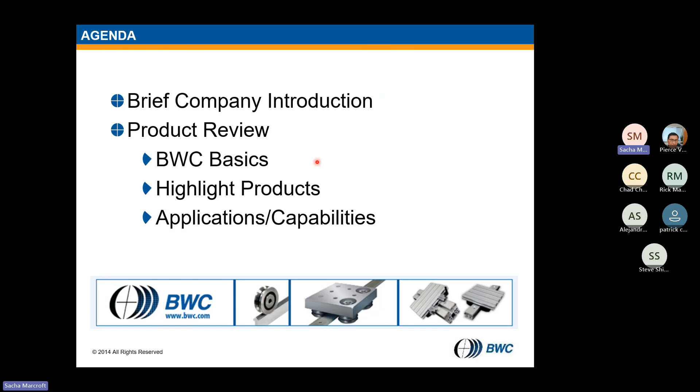There it goes. So we're going to do a basic overview of who BWC is, which is really just a few slides. And then the rest of the deck is getting you familiar with the basics, and then show you some pretty neat applications on how to apply the product.

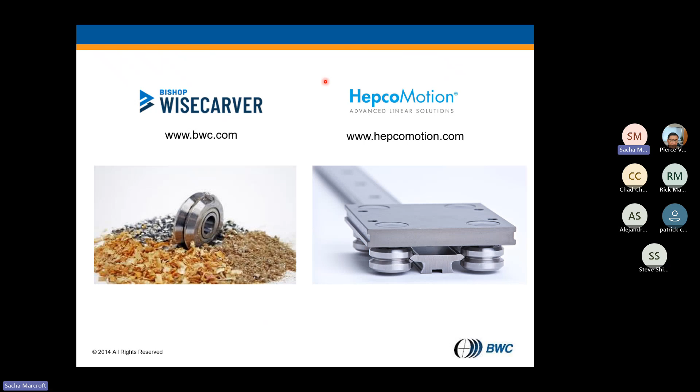All right, so BWC is a U.S. company. It's actually two parts. It's in Pittsburg, California. The other half of the company is HEPCO, which is an English company. They're two separate companies, but they work together. I'll kind of explain the differences here.

So BWC, again, in Pittsburg, was founded by Bud Wisecarver, kind of an interesting fellow. He's kind of what I call farmer ingenuity. He literally had an application for agriculture in the dairy side of things, and came up with this 90-degree wheel in '72, and I'm going to dive into that a little bit.

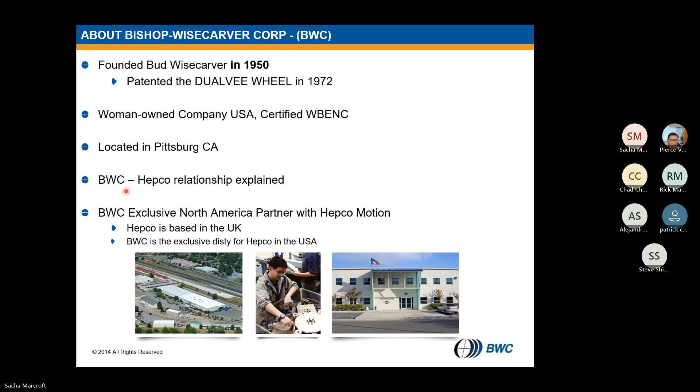So the relationship with HEPCO: BWC is the U.S. master distributor for HEPCO. HEPCO is an English company. We'll take a quick look at those guys as well, and then HEPCO is the master distributor for BWC in Europe. So we cover everything in the U.S. They cover everything in Europe, and that's the relationship. So the key people here, in case you ever need to contact anyone.

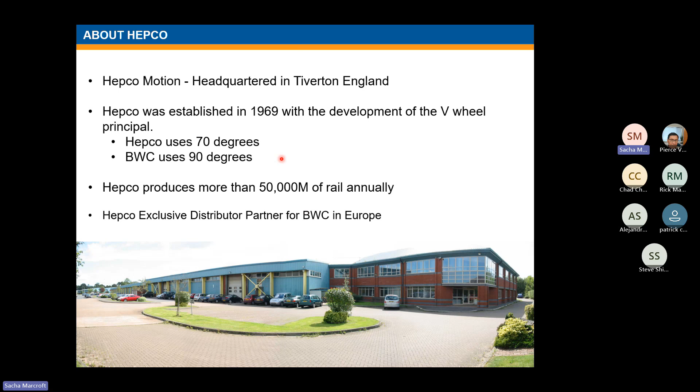HEPCO is headquartered in England. They were founded in '69. HEPCO makes a 70-degree wheel, and BWC makes a 90-degree wheel. Again, that doesn't make much sense just this moment, but you'll see the difference here in a second. And so they produce all kinds of exotic ones, especially curvilinear and other big assembly type applications. So this is kind of where you'd want to apply this stuff.

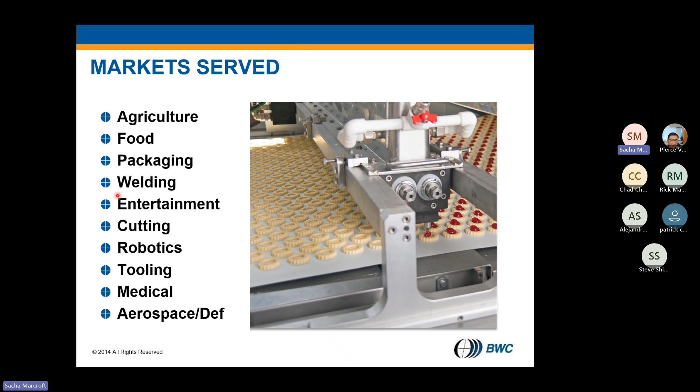These are the same markets we're all covering currently. It's a nice product for dirty, wet, dusty environments. In the entertainment side of things, it's a very quiet tool. And so you'll see those on a lot of the camera booms, the big cranes. A lot of live entertainment has cameras on the end of a crane, and the crane's really quiet. You don't want to have bearing noise while somebody's singing.

So this is kind of the strategy for this product group. You're looking at long, dirty belt drive. It's fairly inexpensive; you can get a 50-foot actuator. With most companies, a 50-foot actuator is something custom. With BWC, it's not a standard, if you would, but it's just part of their skill set. So part of the reason we picked this up was because they make really large rings, which you'll see in a little bit here. Super easy to align, which is another huge feature, and a simple setup, and again, very quiet.

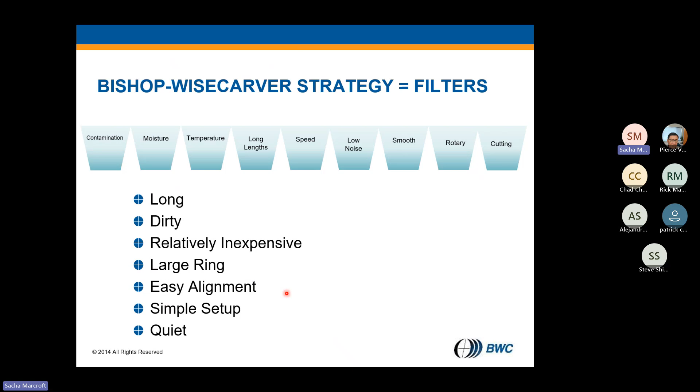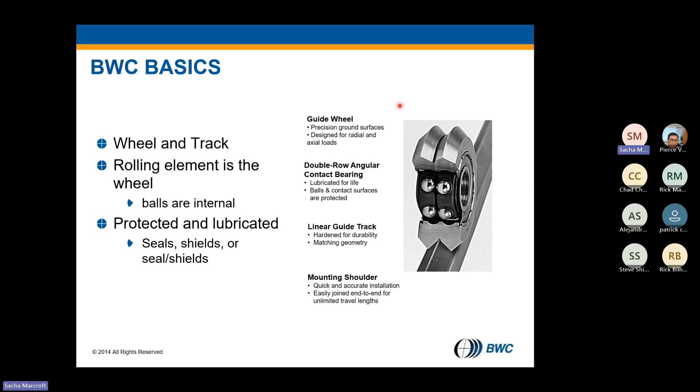So here's the basics, here's where we get into the fun stuff. So the basics of this thing is like most bearings, you get the bearing in the block, and the block moves back and forth, and it rides on bearings. In this particular case, we've got a wheel that's riding on a track, and then the bearings are inside the wheel. Notice the V there. BWC does a 90. HEPCO does a 70. It does basically the same thing.

The principle of the wheel itself: you've got two separate radiuses on a V. You've got the inside radius in here, and then you've got the outside radius. When this wheel is moving back and forth, the inside radius is moving at a slower surface speed. On the outside radius, it's moving at a faster surface speed. But they're part of the same wheel. So what that does is it ends up wiping the rail off as it moves back and forth, which is a great feature for dusty applications, machine chips, anything like that.

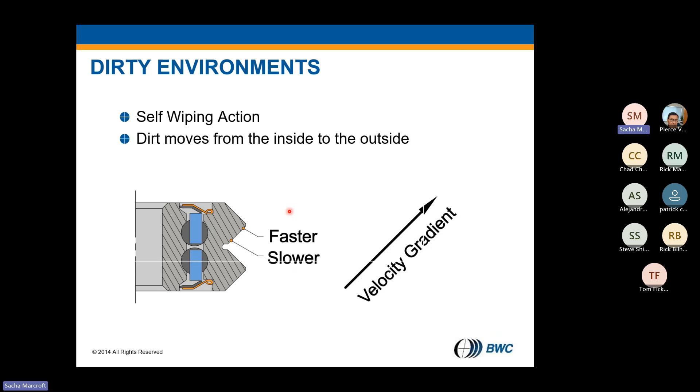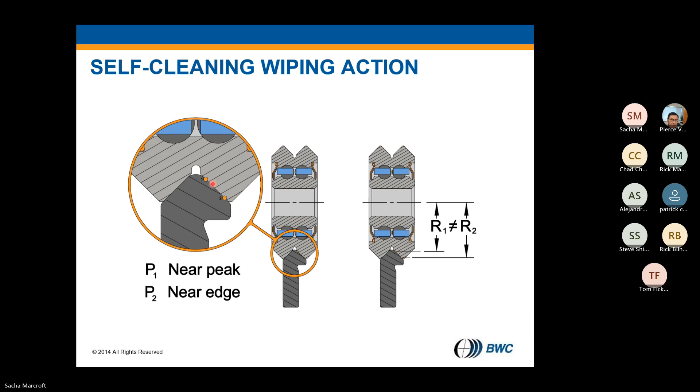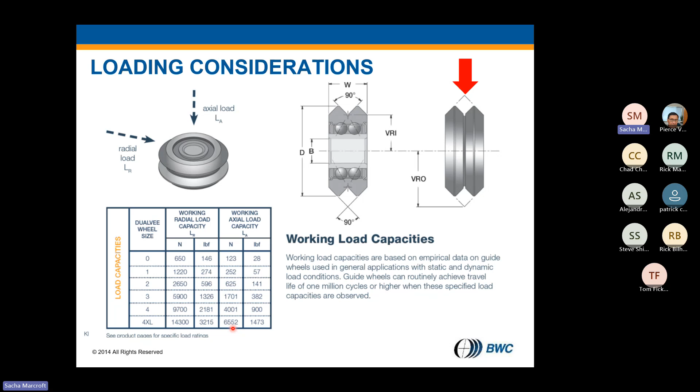The wheels get pretty large. You can get some pretty good load ratings, and this is a per wheel load. So key differentiators: great wiping action, good in harsh environments. Kind of covered that a lot already. Really easy to assemble. We all work with a bunch of customers that think they know how to do stuff and then don't know how to do stuff. This is for the guy who can't really put together a machine that well. Sloppy welds, extrusions. It's a nice tool for misalignment. It's going to be a lot freer.

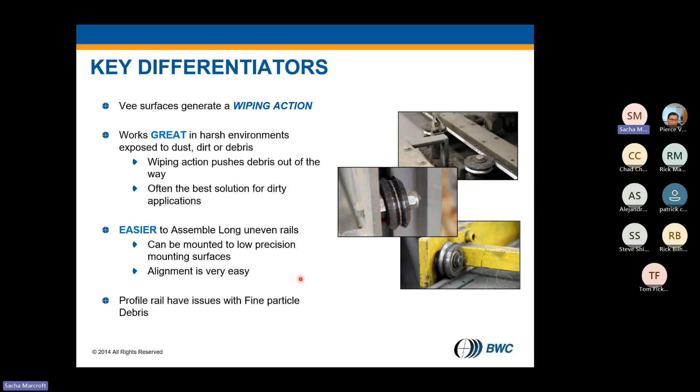The load ratings, as you saw, aren't as high as equivalent load ratings for a pillow block or a profile rail. If the rails are not properly aligned, toed in, toed out, not perfectly parallel, they're not going to move. So just know that this is your tool for that guy. Profile rails don't like fine particles like powder, flour. Again, the laser ablatement stuff is super fine powder. It gets in the bearing and seizes them up. Ball screws have the same problem.

Don't get yourself killed. They have wiping pads, and what that does is lube the rail for you. They also have lube pads for the wheels. You put a drop or two on there every couple of months while this thing's moving back and forth, and you're going to get a longer life. This thing does generate particles. It's self-wiping, which means it wipes itself off. So it's a little bit tougher in a clean room. It's possible to use clean room grease, but just know it particulates.

Consider preloading. This is not a precision tool. You're going to see the catalog, and everybody thinks they're precision. They call out precision ground rails and this and that. It's not a precision tool. It's going to be great for long stuff and dirty stuff.

Even though the wheels say wash down, uses caustics and other nasty items. The wheels and the rails are carbon steel. Carbon is the key word. It's going to rust. You can coat the rails, but they're gonna eventually flake. They're the best horse in the glue factory, is what I like to say.

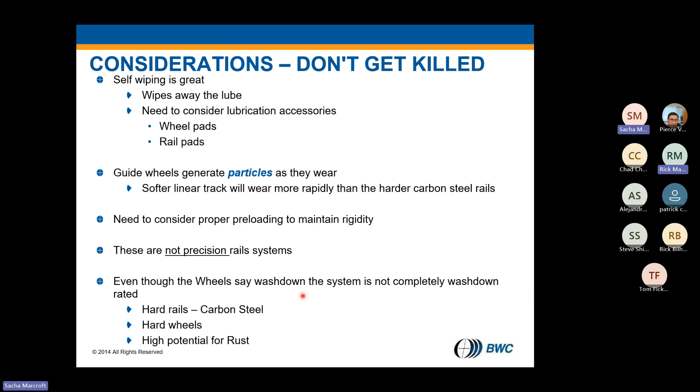All rails are gonna do the same thing. These are just gonna be a little better. All right. So not the greatest for wash down, but they can be in wash down, and they will rust. Just an FYI.

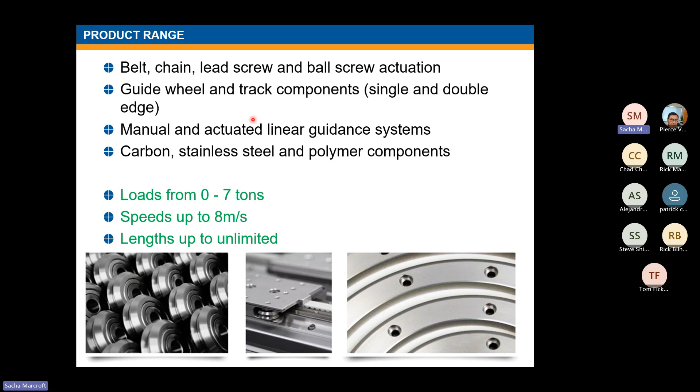All right. So some of the products, some of the choices. They've got actuators with belt, chain, and screw. I'm going to show you some manual ones as well. They've got a bunch of different product that we're just going to kind of overview real quickly here. So the key to this product is a wheel and track.

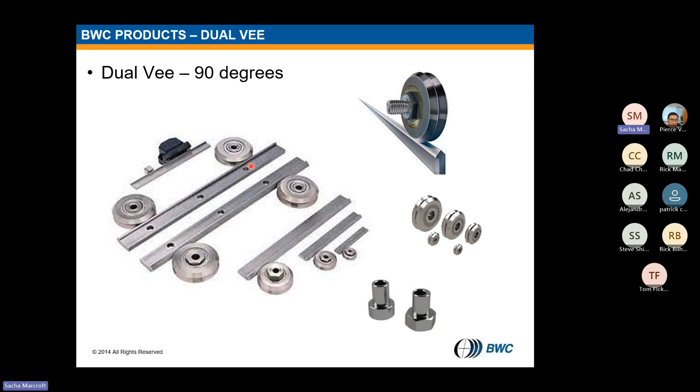If you guys are specifying it to an OEM, you're more than likely going to set up this kind of a situation here, or we can order pre-drilled. You can drill your own. There's all kinds of different rail types that we can choose. There's different hub types. There's wheels with hubs, without hubs. You can put a stud in them. Here's the stud version. So lots of different setups. This is going to be your main go-to for an OEM.

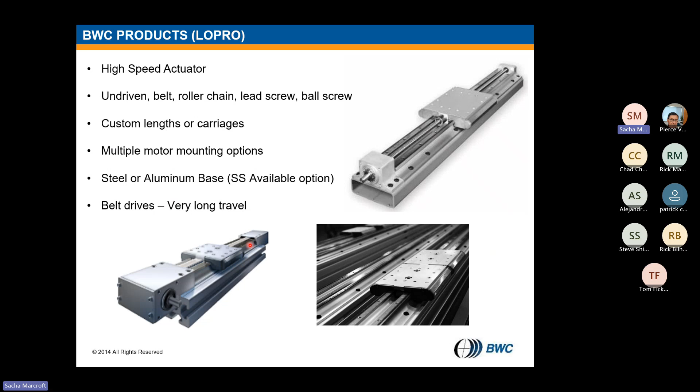Here's some examples of some different tools. They have bracketry set up for gantries in case you wanted to do a gantry with a stinger. They use this same tool as an RTU for different robots. Here's that LoPro. This is kind of a better view on the bottom here. They do aluminum based and steel body based as well. So they've got a few different setups for these guys.

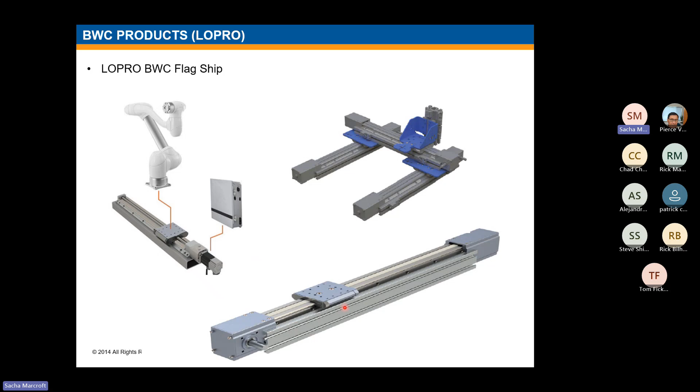This is another nice little tool. It's called Utilitrak. It comes in 3, 4, 5 wheel carriages. The unique thing about this thing, again, is that alignment I was telling you about before. This is an undriven tool, but you can put your own belt or whatever else you're doing if you're doing a big gantry. We've done a lot of manuals with these as well.

You lock in one side with a V, radially, and then you float the other side with the crown, so that your alignment isn't as critical. When you're doing a 10-foot gantry, aligning things gets a little bit tougher, especially on an extrusion. So this is a nice little tool for that kind of use.

They're employing this tool right now too in a telescoping type rail that should be coming out here pretty quickly. Would be a nice little tool for extended trays. Different machines use different rails for different reasons, but telescoping is always one that we get asked about.

And they have different wheel types as well. I don't know if you noticed this kind of a tan wheel here. That's a poly wheel, really super quiet, obviously low load rating, but if you need quiet, something in a medical environment, it's not a bad tool.

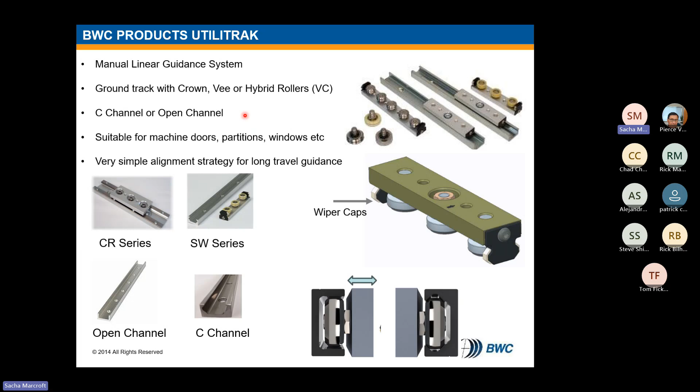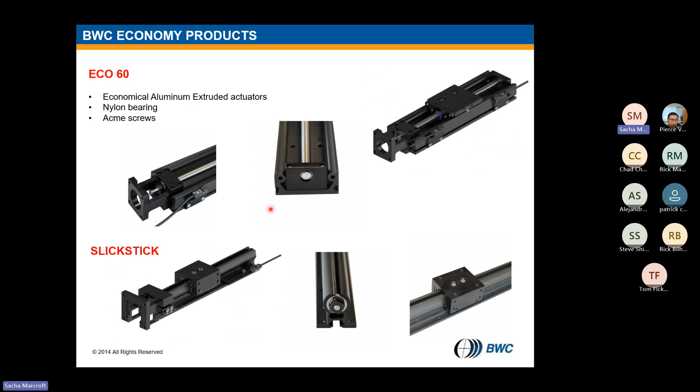So they have these other slick sticks, and I wouldn't recommend these guys, but it's in here, so I'm going to show it to you. These use nylon bearings on a hard anodize. It's a nice little tool, inexpensive actuator. We have a lot of choices for those, but this is the BWC versions. Not bad. Just nothing you're going to want to employ with any kind of load.

The RTUs, they've got different carriages set up for different robots. So just tell us what robot you're using. We can slam the carriage on there. The holes are already ready, the cable track's already ready. It's a pretty nice, simple way to do it.

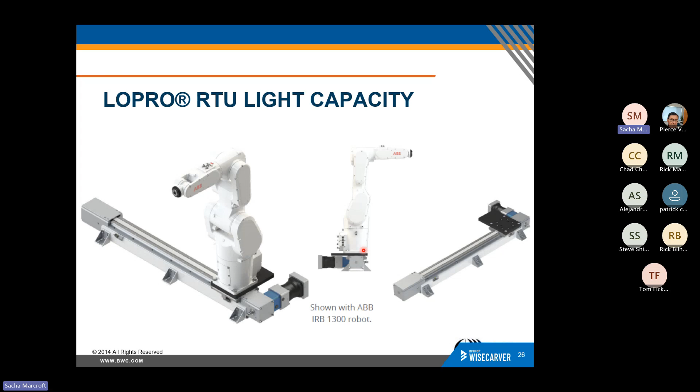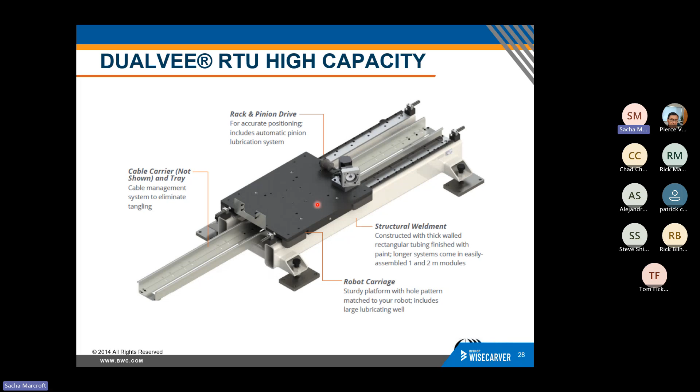So they've got a low duty, medium duty, and a high duty. These pieces come in, I want to say, 1 and 2 meter sections. Rack and pinion, Stober rack and pinion, by the way, the best in the land. But this is for the big heavy duty robots.

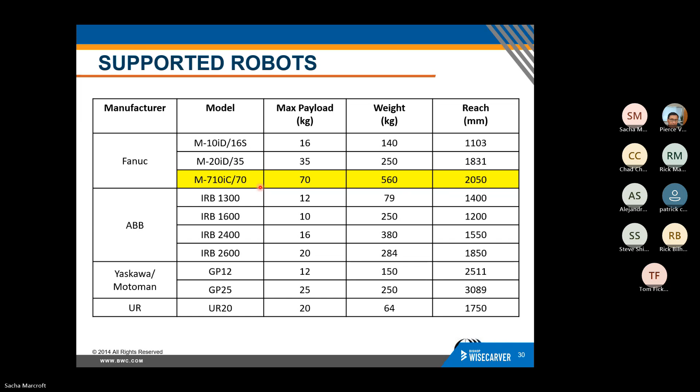Sectional, pretty convenient. Different robots that we've already set up for. So here we're going to cover the HEPCO side of the business now. So HEPCO again is the company in the UK, and BWC is the master distributor in the US. So anything in continental North America, we are able to sell HEPCO.

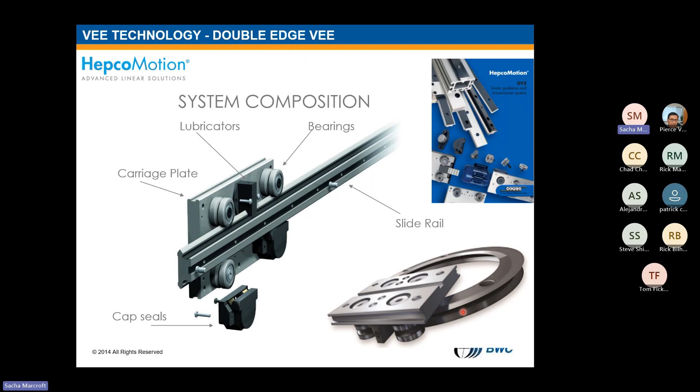And I kind of chose this line for this ring down here. It's kind of a nice little tool. You'll see more here in a sec. But they've got some unique stuff. Their wheel is a 70-degree wheel. So if you pick a HEPCO wheel and a BWC rail, they're not really going to work. But note that the inside-outside radius is the same concept, so it's self-wiping.

And you can see they can do pretty good loads. That's about 7 tons. It's not a precision tool, but if you want to get it around a little tighter, you can. But they have some nice tools here. That box aluminum beam there, to give you reference, is a 1 foot tall beam. So you can set up some pretty big gantries with this.

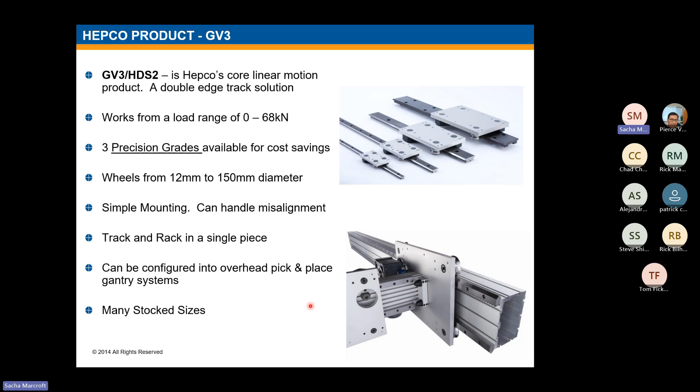You can see the heavy duty rails with the rack in it as well. So that's a nice feature. Again, if you're designing stuff on your own, you can bolt these to a weldment and have some pretty good luck without having to be too high precision. Here's the radials that I was talking about. These are really nice tools.

If you've ever done a CAMCO type application, where you're limited to a number of indexes, you're doing a big ring or something. We've done stuff from 100 millimeters in diameter all the way up to 28 feet. So this gives you a lot of flexibility. You can have a carriage type, or you can have one where you're spinning the ring. They've got inside rack, outside rack, single-sided rail, dual-sided rail.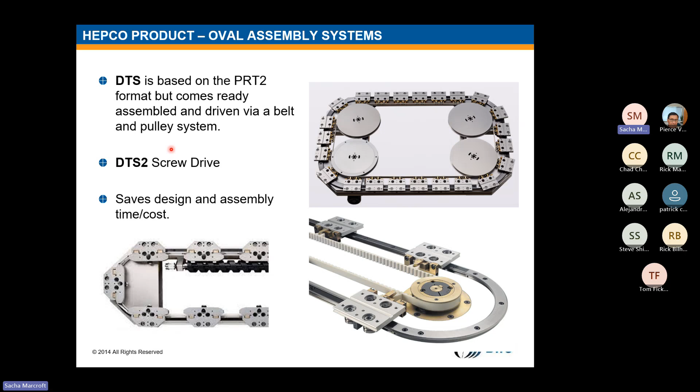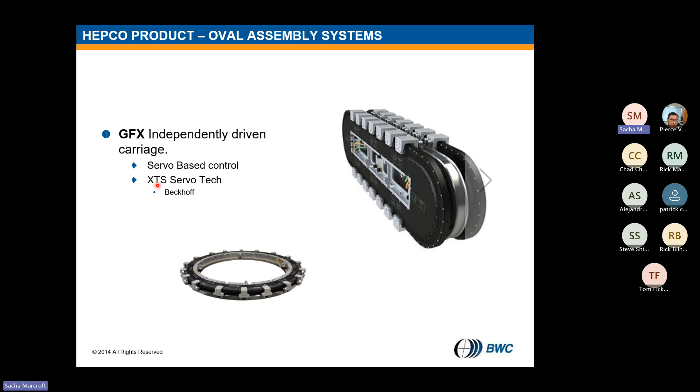They have a collaboration with Beckhoff. Beckhoff does the servo ring, right? So each one of these carriages is independently driven. It's independently servo. So this is a forcer. They can move along the ring independently and be kept track of. It's a pretty nice unit, super high speed. This is called the GFX, and it's a collaboration with Beckhoff.

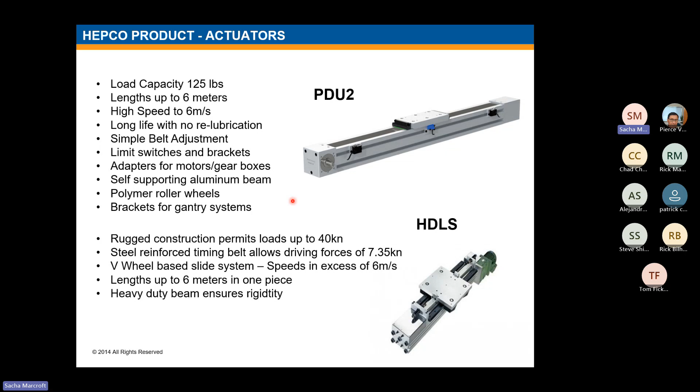They do have actuators, aluminum-based actuators, both belt and screw. They're really nice, just a little bit high priced, but they do have some big ones. I did one at a place that makes sheetrock, and the profile was 200 by 200, so it's just a giant actuator, times however many meters long it was. I think the inside bearing was a size 30 profile rail, to give you a feel for load capacity. So they do have some nice product.

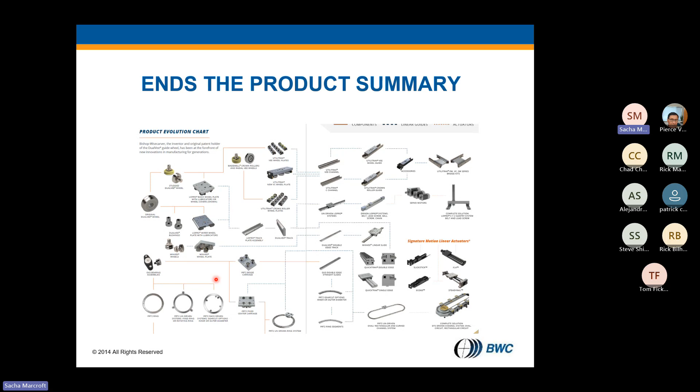And so this is kind of the end of the summary. This is a BWC evolution page. You can tell there's a lot of different products that you can employ, all based on this V technology. They do have a couple of profile rail and round rail stages that are pretty good. But for the most part, you're going to be selecting this product because of the rings or the V track.

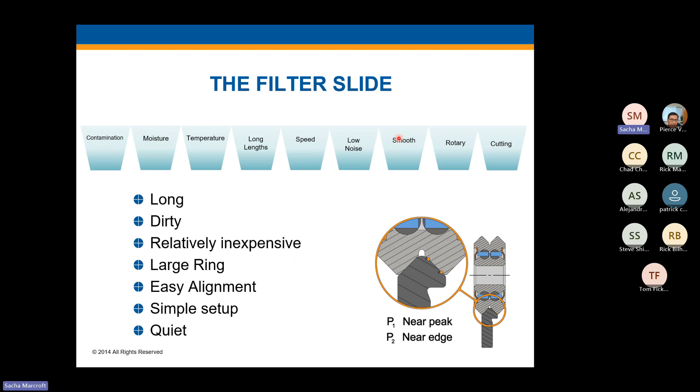You're thinking long and dirty again, high temperature, low, you're in an oven, you're moving stuff back and forth. Very smooth and low noise would be more of the entertainment side of things. Big rotaries, big cutting equipment. Here's some applications. I'm going to run through some pictures here because pictures tell a bigger story, right?

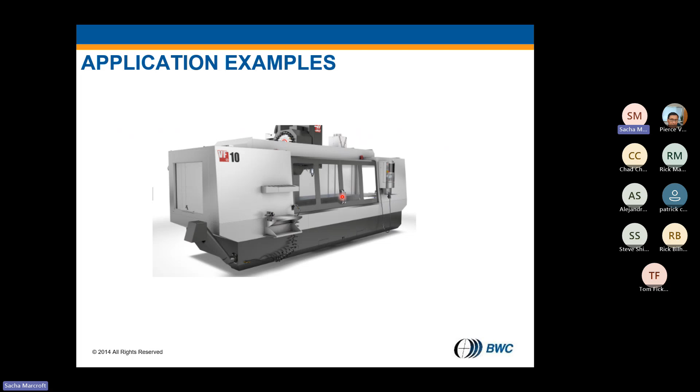So Haas uses these for their doors, right? So chips are flying everywhere. Pretty much the most dirty environment you can think of, but they've got good load rating. They're quiet and they shed their own chips, right? So perfect for this kind of an application.

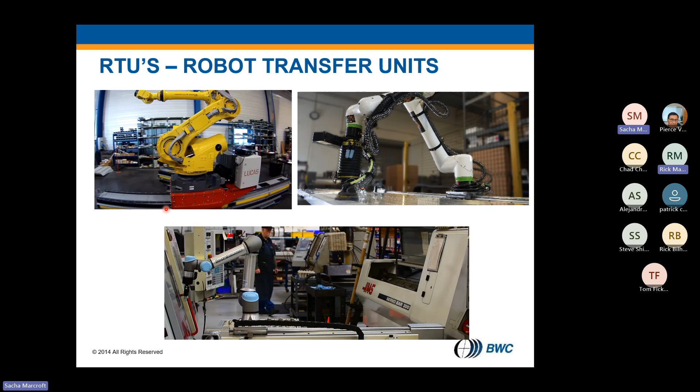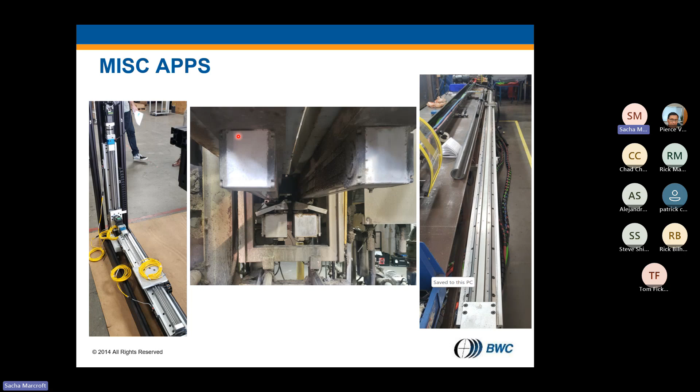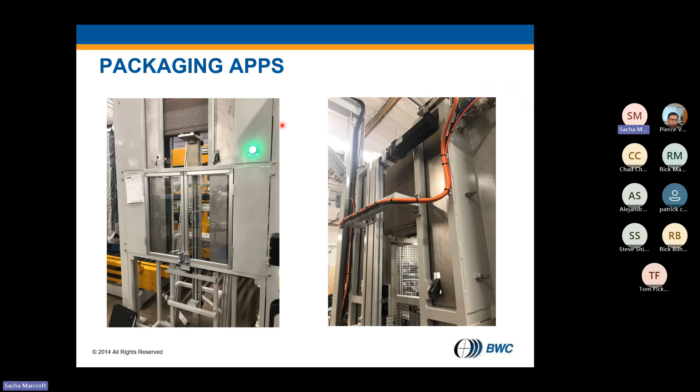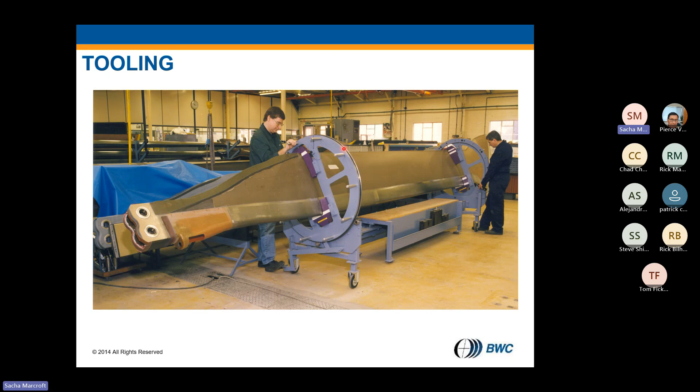This was for an alignment tool down here on the left. This is one of yours in Arizona there, Rick. Moving a bunch of product around. You can see the Z-axis here is another look at it. So it looks pretty good in the machine. Again, cardboard dust, not a friend of a profile rail. Here's some tooling applications for the big ring. It's a big helicopter blade, easy to manipulate and rotate around manually.

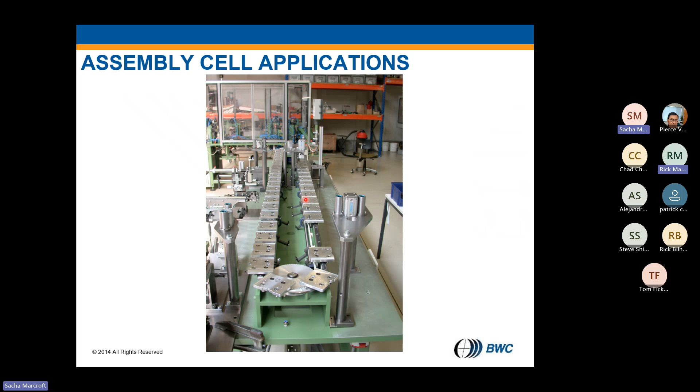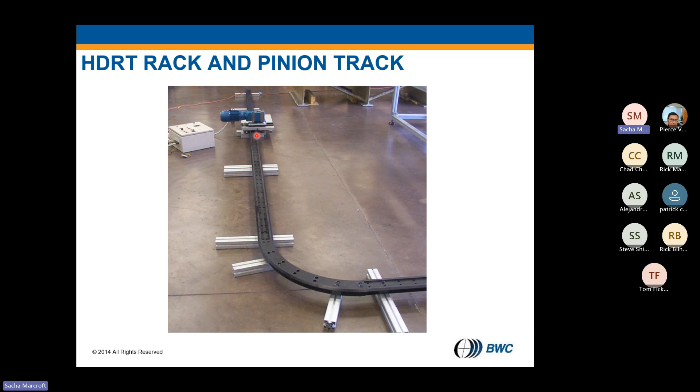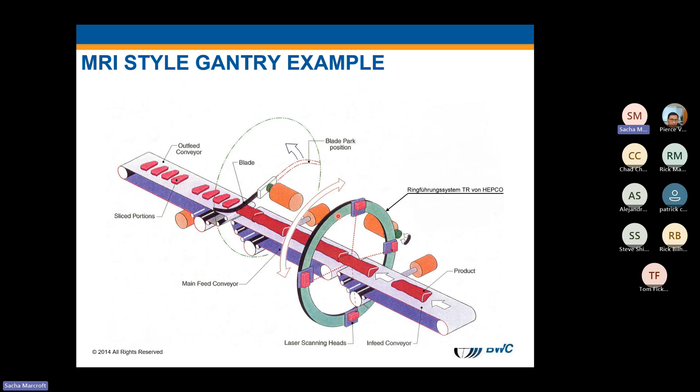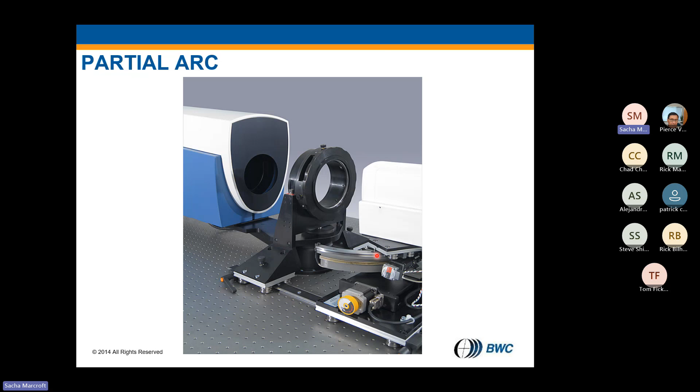Here's a gantry application where they're doing some meat slicing. The big gantries for MRI and other type applications. We've done some weird applications with this. Partial arc is kind of neat for measuring. You can get it in segments from 90, 180, 270, and I think some exotic ones as well. And you can see how it's used here. This is doing a radial scan.

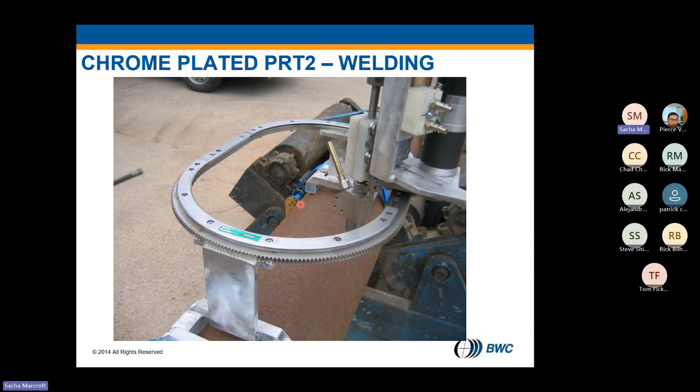Gotcha. What's the RPM limit on those rotational ID and OD driven rings? You're not handcuffed really. It's there, you know, until it gets out of control. So yeah, the beauty of it is you stick a servo down on the bottom, and then you're able to spin as fast as you want.

Because it seems to me that that's an interesting alternative for a slewing drive, and slewing drives are very limited. They're limited to 3 RPM. It is, yeah. Right, right, due to the worm. Yeah, so the rack offers a lot of benefits there too.

Most people don't realize that a rack and pinion is the fastest tool to use if you need to come up to speed for acceleration. It exceeds a linear servo, right? Everybody thinks, oh, linear servo is super fast. The fastest thing to come up to speed, acceleration wise, is going to be a rack and pinion. It may not have the same top speed, but to accelerate up to speed, you have a lot of mechanical advantages to employ. You can put a gearbox, like you can notice there's a big right angle gear motor here.

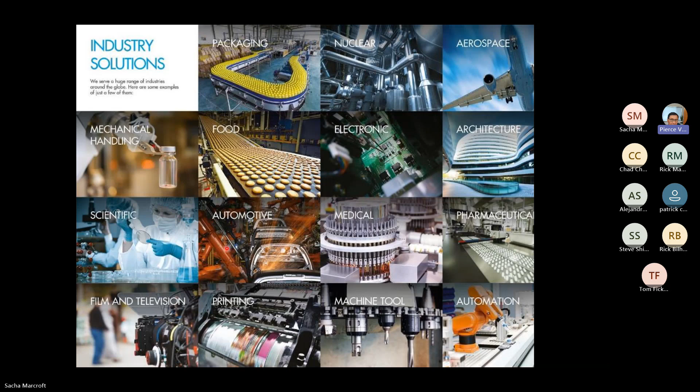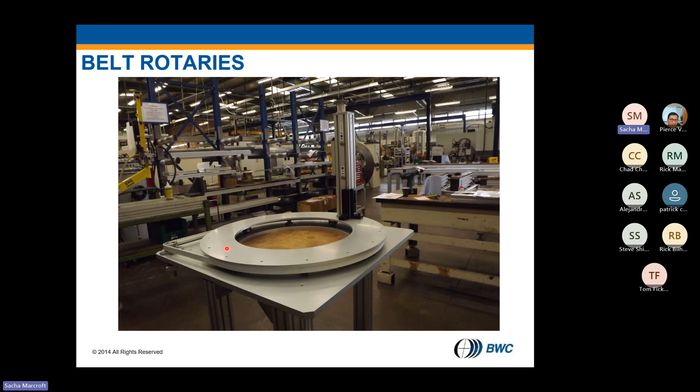Well, on dial plate applications for pharmaceutical powder pill filling, I'm thinking M&O Perry and Corona. Is this a product that is accurate enough for that? Yeah, I mean, there's a lot of ways to employ the thing. If you're doing something like this type of assembly where you got pallets moving around, you can shoot a pin into position once it arrives. Let's say this is our assembly area right here for one part of the assembly. When it moves, you can pop a locating pin in there to seat the thing where you need it within a few microns, right? As it moves back and forth, it's probably not that repeatable, right?

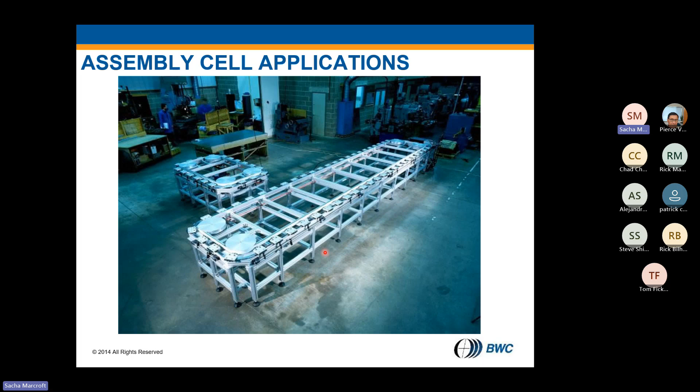Because you get this massive ring on a belt. So yeah, you definitely want to employ that with a big ring. You can do the similar idea, or employ some kind of a feedback device, right? So that you know whether you're in position or not. With that big ring there, what would be the disadvantage to a slewing drive? Does it not handle as much force? I would imagine the overturning load is not going to be that great. Well, yeah. So big moment loads you're gonna have a little bit higher. Well, maybe just answer it this way: slew is going to handle a lot more load.

Right. How you manage load with this is you just add more wheels, but after a while, adding wheels doesn't really get you any benefits, right? Because it's like a profile rail, for instance: when you take the block, 80% of the balls are in contact. There's some balls that are not in contact. So when you have a giant ring like this and you add more wheels, not all the wheels are in perfect contact. The more wheels you get, the worse it gets. So then you have to derate the thing a little bit.

But you remind me of something I should bring up. When you're setting up a wheel set like this, both of them have the same idea. They both got four wheels. What you want to do is set up two concentric wheels, right?

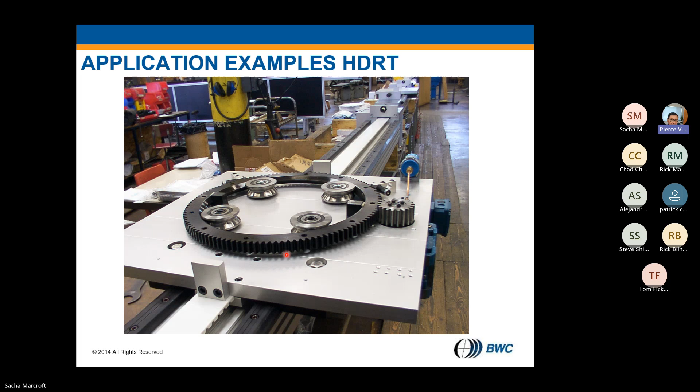Okay, because this seems to me to be a nice complement, albeit noted on the lower load rating, to the slewing product that we have from Cone, because we do run into applications that are 4, 5, 6, 7 RPM, and the slewing ring doesn't perform well in those higher RPM ratings. Right, and the slew ring kind of stops at around a meter diameter or less. Yes, you're correct. And this thing, I mean, we spec the thing for Disney up to 28 feet in diameter. So they'll listen to anything and do custom.

So, I think I did one with Todd at Lockheed. We did a 10-foot partial arc ring, right? So, had it been a full circle, it'd have been 10 feet in diameter. But I want to say it was a little over 180. So that was kind of a special one.

Yeah, so I've got one in NoCal right now where they're scanning the end of a pipe, and that's another partial arc. They're 3 or 4 feet in diameter. I can't remember what the number is, but right in that range, scanning the end of a pipe. So pretty cool.

Do we deal with the remnants of Vernon Tool, which is now Lincoln Electric up in the Sparks Reno area? That's a company that does welding of giant pipes for the oil and water industry. Yeah, Lincoln Electric, the one that was in San Diego, uses a bunch of BWC on their Z axis. That's right. Pretty heavy duty. It was a pretty neat tool.